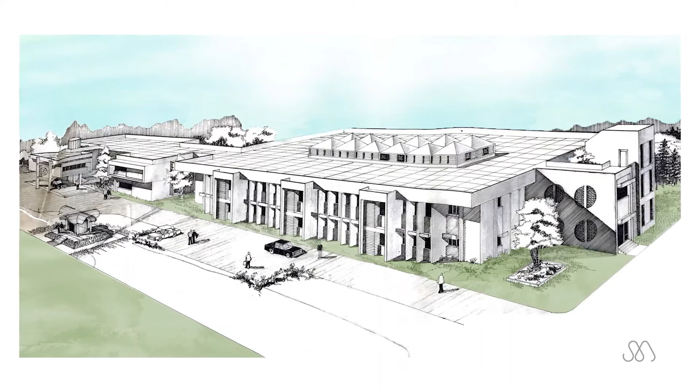But then it got tied up, and once I came out in 1980, I started practicing. The town I settled in is a Tier 2 town, not a metro city. This city didn't know much about architecture and the role of an architect on site. Even the engineers didn't know, and I had to call myself an engineer sometimes.

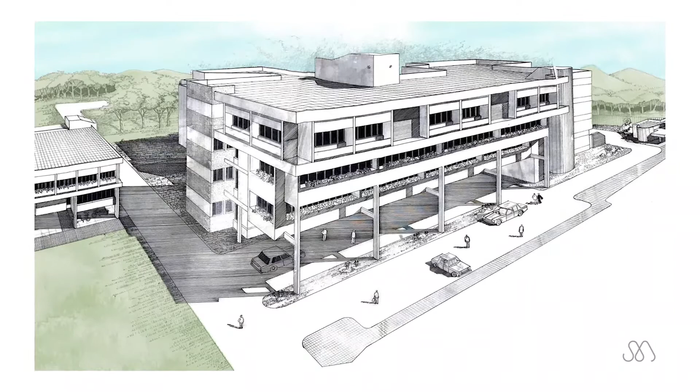There were no consultants. I had to do the structures, the quantity surveying, visit the site, and there was no project management. Even HVAC and plumbing, sometimes I had to take decisions by myself. So it was quite tough for quite some time, and somewhere in the 90s it started developing when we got systems, computers and software, and slowly people started migrating towards Trichy from other metro cities.

So with this, maybe in 2010, it became a partnership firm. My son Santosh Shanmugam studied in the US, worked for about 5 years there, came and joined with me, along with his classmate Rajakrishnan, who studied in Bauhaus, worked in UK, and joined with us. From 2010 onwards there was a regeneration, and the whole office completely changed to a contemporary structure.

All my drawing boards I have donated to some schools, and everything became systems and software. The space shrunk, but the quality increased, and the whole way of working became totally different from earlier.

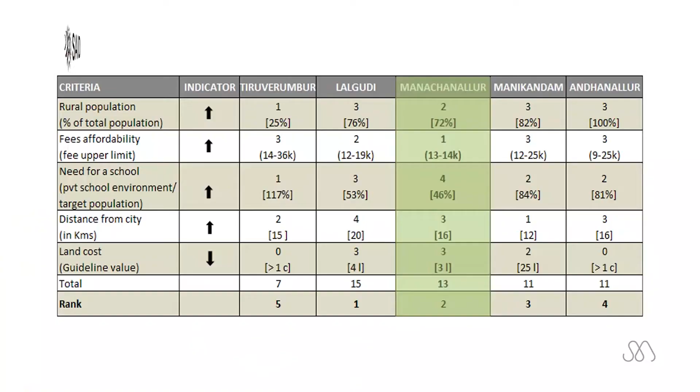In Tiruverumbur there are quite a few other institutions available, whereas in Manachanallur we find only very little option for the students to go for a CBSE school because there are only 1 or 2. And this place where we are located, for about 10 kilometers around, there is no CBSE school.

So we have located that site which is around 4.5 acres, which is not again on the main road. It is in the mid of the village, which is easily approachable by the village people. It's a clear flat land of about 4.5 acres with which we started the planning.

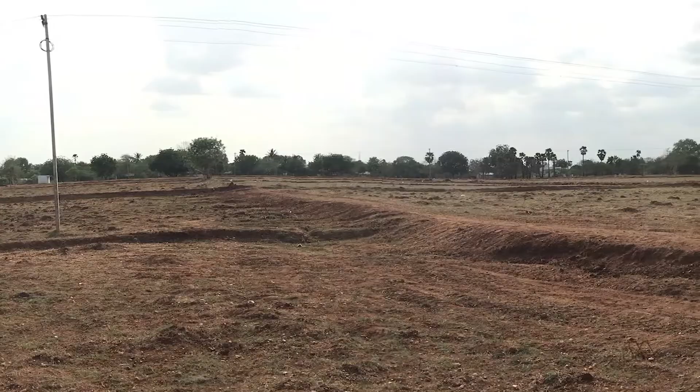We have started the planning with two major open spaces. One is the running track, which is also part of the CBSE requirement to have play spaces in the open air. So a running track for which approximately 1.5 acres of land is being given off. The rest of the building has to be planned as a linear rectangle onto the north and south, but the major site faces east and west.

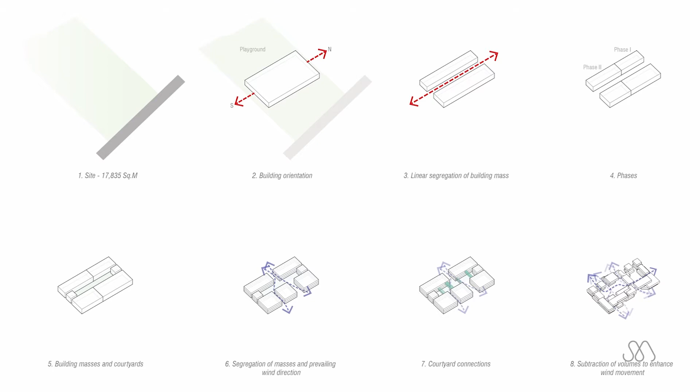But we took that to our advantage. When we studied the breeze direction in Trichy, it is more southwest, west, and northeast. So we made two blocks, segregated and segmented into blocks, and through the blocks the breeze goes in, and we also gave diagonal air tunnels from one end to the other.

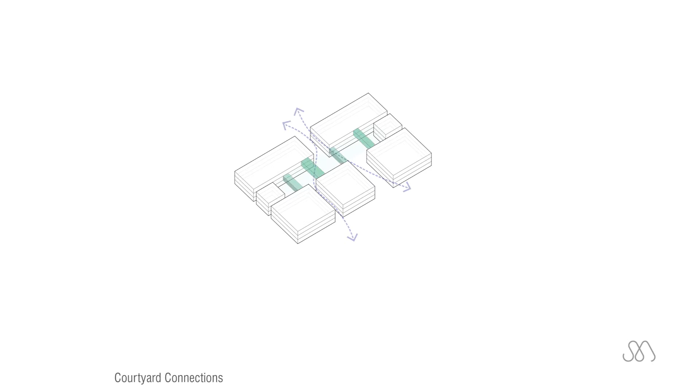And when we were doing the massing, the classrooms have gardens in between them, and the garden, one way, gives deflected light to avoid direct sunlight from the west and partially east, and it also gives a relief for the students from one area to the other.

So the whole massing started with fragments of classrooms stacked one above the other, not exactly one above the other, but with a stagger, and with wind tunnels and light catchment areas through which we get the deflected light.

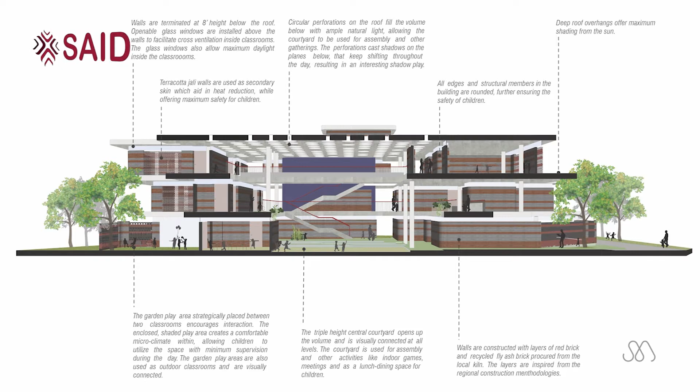So in the section you can find the walls stop at the 8 feet level, and between 8 feet and the roof it's been left open. The idea is for the hot air from the mass assembly to escape through somewhere. Otherwise, in a regular conventional building, the fan rotating from inside takes the hot air from the ceiling, and after some time the whole area becomes hot, which is not a very comfortable situation.

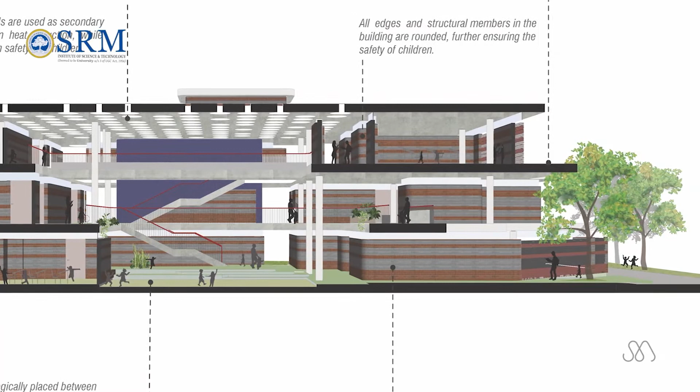So we thought we would open up on top so that the hot air would escape by itself. It's been done for the entire building so that everywhere it is open and the air flows at that level, and the hot air and radiation could be reduced. But later, due to maintenance, we found a bird menace and dirt coming through.

Of course, we did one mock classroom. We discussed with the academic people, and then finally arrived at glazing and ventilators. The ventilators will be open during class hours, and the glazing is mainly for deflected light to come through, because we have given overhangs almost everywhere beyond 4 feet, so 3 to 4 feet. So it is always under shade during class hours, and we get deflected light through that.

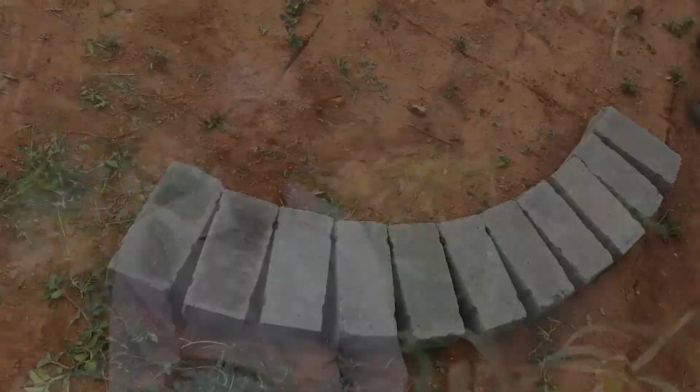We have given garden spaces on the ground floor for the kindergarten children. The garden space and the classrooms are almost the same size, so that anytime the students can go out whenever it's shaded, there is a relief. Curved walls - this is another thing which we have tried in this project.

Instead of sharp edges, the entire building is filleted with curved walls, so that the students don't get hit when they are running, and it gives a kind of character to every corner, both interior and exterior.

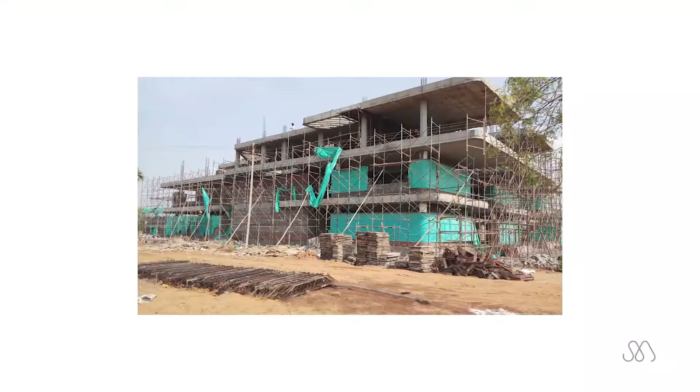Another concept we tried here: this is not a regular frame structure where the column, beam and wall come above that. The columns are very close to the walls, but we made the walls independent so our facade with brick and horizontal pattern continues without any break, and the columns are made curved and circular.

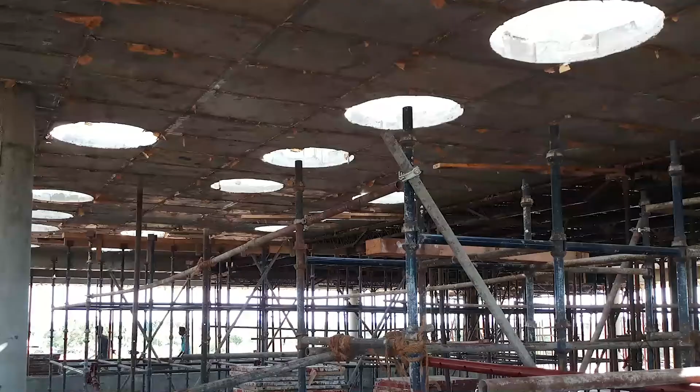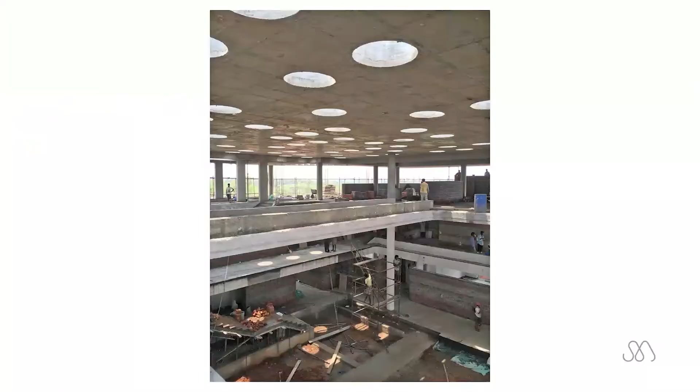So columns are made circular so that it will not be a hindrance to the students when they are breaking out. We have the central courtyard, which is fenestrated with circular openings, and these circular openings make a very nice shade pattern inside, and the courtyard becomes a kind of multi-purpose place where people play and music goes.

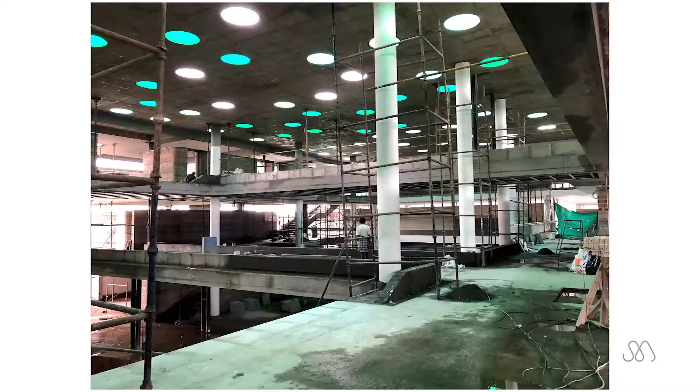During lunch hour we can see people eating, and in case of parents' meetings, sometimes it happens there, or any other activity like dancing - it becomes a very interesting place, and the sunlight moves from morning east to west, creating a nice pattern.

We bought some well rings and placed them over there in different patterns to create an interesting atmosphere.

Further, connecting bridges are placed between one section and the other, and we have not placed the bridges one above the other - it is again staggered from one to the other, so that it creates an interesting atmosphere that also satisfies the fire norms.

The staircases similarly - even though at the entry we have a regular staircase and a lift meant for the handicapped, the other staircases inside are quite broad and no staircase is placed one above the other. They go up to one level, there's a kind of landing, then walk a few steps to the other level. These staircases and bridges create a visually interesting atmosphere inside.

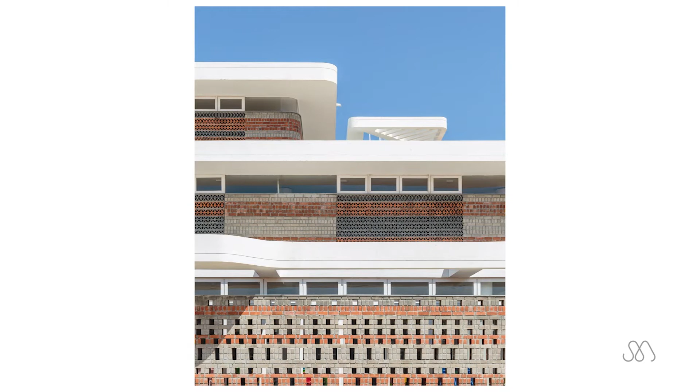We have done the walls with layers of terracotta bricks which are locally available, and also fly ash recycled bricks which are locally available. We went to the village around the temples there, and the traditional structures had layers of construction - bottom layer with stone, other layer with brick, and sometimes with lime mortar, and again done with bricks. So the temples are all done with bottom layers as stone and top layer with brick.

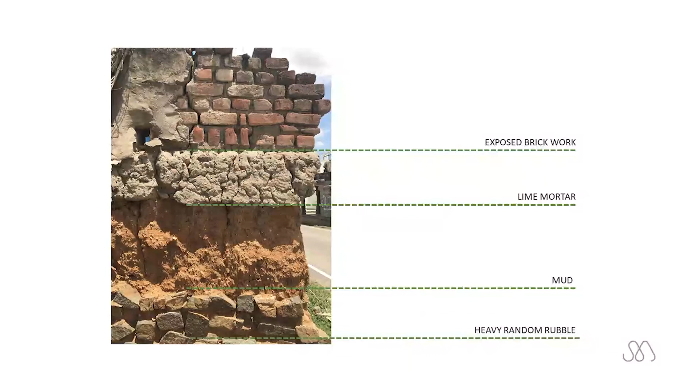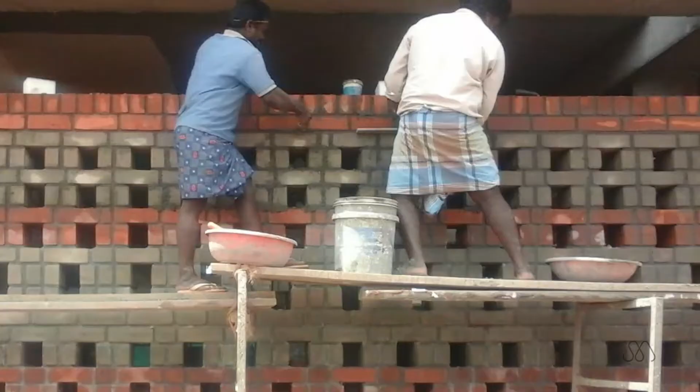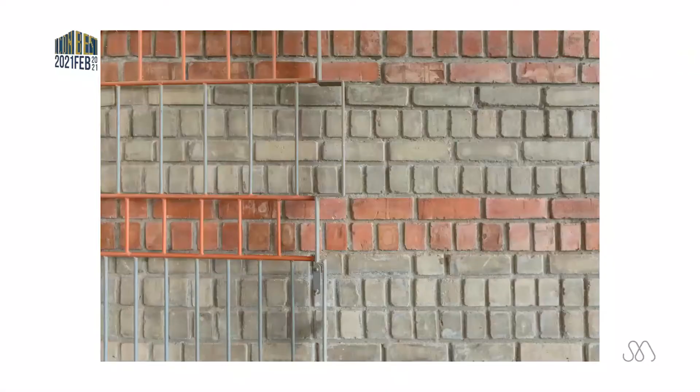This inspired us to have horizontal layers, so we used the locally available bricks and created a horizontal pattern, which in one way makes it economical, because the budget is also one of the reasons we did it this way. We have exposed it - no plastering, no putty, no painting - and even in the long-term maintenance, nothing is needed. So the budget is met, and a kind of rugged texture is formed, linked with the horizontal lines, which makes it quite interesting.

Now you can see the overall site plan where the ground is on the rear side, the OSR - open space reserved - is in the front, and the linear mass is placed in the center. For convenience, we made it into two phases. From the entry, you have the first line of security, and after the security we have the administration, and from the administration we go to the other departments.

As you see in the ground floor plan, as soon as you enter, on to the left is the administration, where the principal and vice principal sit. Their rooms are positioned such that they can see who is coming into the portico. Then there's the office and a small conference room, and of course the administrative setup.

After this, a grill gate is worked out so the student's path is completely secured. On the other side of the administration, you have the staff room. On to the left, we have the classrooms with gardens in between, and on to the right extreme, what you see is the library.

We have placed another wall in front of the main wall, like two layers, so the windows could be quite big, and in between the two walls there are greeneries. Originally we wanted to give a water body all around the library, but we made it into a garden instead, with big windows, a garden, and a kind of lawn, all part of the library, so the kids will always be interested in going to the library. So that's as far as the ground floor is concerned.

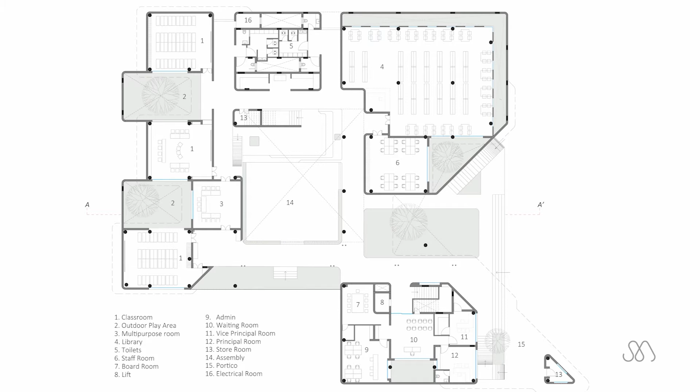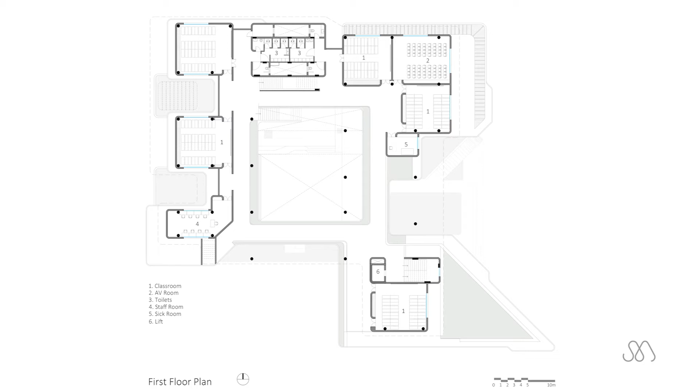Going to the first floor, at the front you have the regular dog-leg staircase which takes you to all the floors, along with a lift meant for handicapped people. On to the right, when you enter, you have a single wide staircase which takes them to the upper floor, and all the classrooms are tucked one above the other, with wind tunnels provided in such a way.

There are openings in between the classrooms which allow the wind to come in, and also deflected light. The fenestrations in the planning of the blocks allow the breeze to come in. On the second floor also, you can see mostly classrooms.

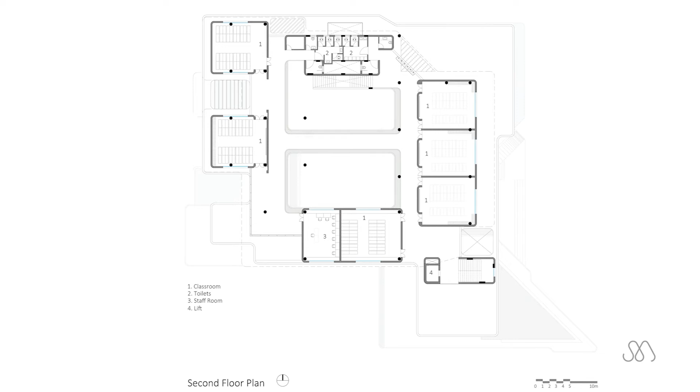One of the bridges connecting both ends is being made into a staff room, so that staff sitting there can overlook the entire happenings. When phase 2 comes, that becomes like a watchtower from which the teacher can watch both ends.

Now we will browse through some of the other learning spaces we have worked out for others. Rane Polytechnic is a ground plus one floor structure, executed in two phases. The central amenities were located keeping in mind visual prominence and immediate accessibility. The amenities, comprising computer lab, library, and seminar hall, have been planned as an island with garden and water bodies.

The surrounding classrooms have fenestrations in the north and south direction. There are stepped courtyards connecting the levels and also serving as congregation points. Considering the tropical climate, ground floor roof slabs are extended and vertical piers are placed in front for shading.

The planters have been placed within the vertical piers so that a small garden is there in front of every window. Lush green courtyards and double height shading devices have been introduced in between the built forms in Rane Polytechnic.

North Star School is a progressive international school located in Rajkot, Gujarat, and sits on the eastern corner of 17.5 acres of barren land. The semi-arid climate, dusty yet windy site conditions, 20-30 days of monsoon in Rajkot, and supply of STP water from the abutting RK University were influential contextual pointers.

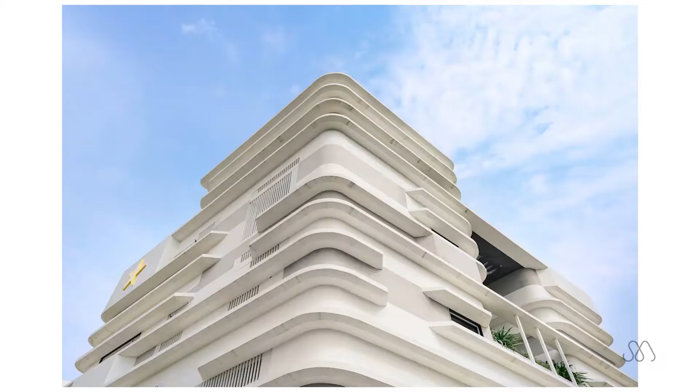North Star Nest is a kindergarten campus located in Rajkot, in easy proximity to the children. The overall massing had been played with to make this stilt plus 3-4 building look bigger.

The building is wrapped with horizontal louvers that act as a shading device and bring down the heat. Double height spaces have been introduced in staggered fashion and are interconnected on all the floors. These spaces have been provided with water and informal seating in order to have interactive fun activities.

The last roof has alphabet cutouts in the ceiling so that kids from the elder classes appreciate and understand the shadow play. Focusing on sensory perception, colorful handmade cement tiles have been introduced in the classroom floors and common areas.

We have also done some more institutions, colleges, and other types of educational institutions. You are welcome to browse through our website to know more about us.

With this, I thank SRM School of Architecture for the great effort and for the opportunity given to me at international level. It's a prestige to the hard work we have been doing for the 40 years. And for the youngsters, it's very encouraging to be more enthusiastic, to prove themselves not only at the national level but at the international level. We would like to participate in any competition also. Thank you.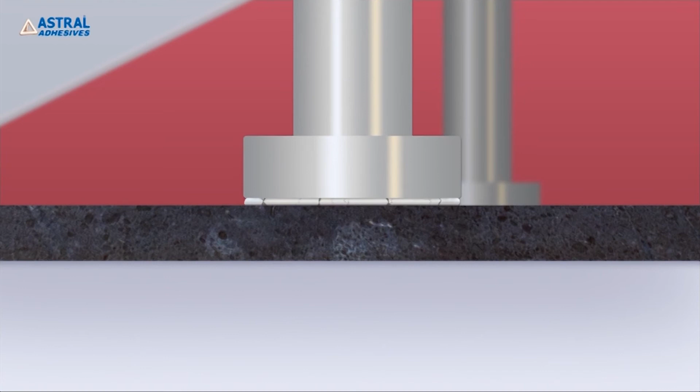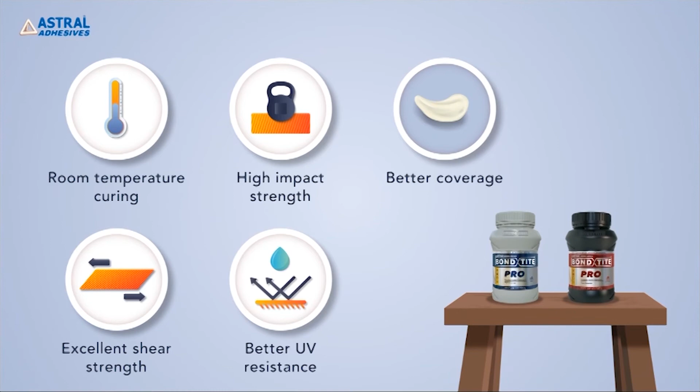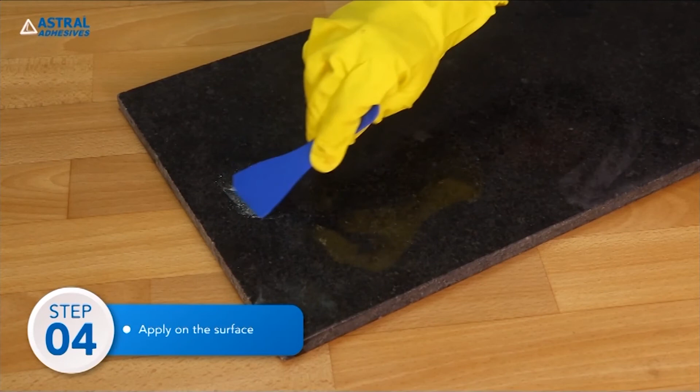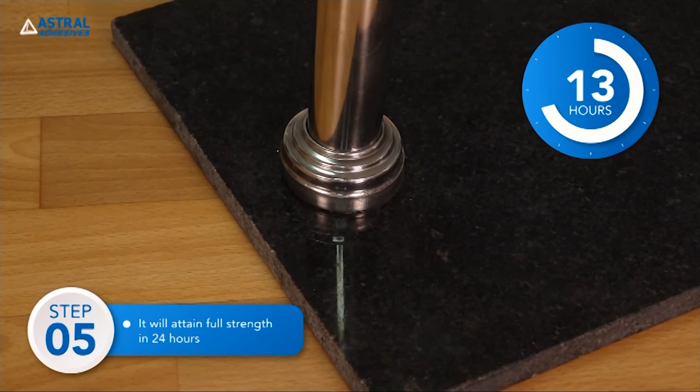Epoxy adhesives are widely used in the industry because of their high strength, chemical resistance, and ability to adhere to different surfaces. But almost all of them have low impact strength and low UV resistance, which makes them weak after long-term use under stress. To combat these issues, we are introducing Bondtite Pro, a high-performance two-component multi-use new generation epoxy adhesive system with room temperature curing. It has very high impact strength, excellent shear strength, better UV resistance, better coverage and more. It is used for bonding various similar and dissimilar materials such as metals, ceramics, wood, leather, rubber, marble, and glass. Bondtite Pro is very easy to use. Step 1: clean the surface, free of dust, loose plaster, oil, paint, grease, algae and corrosion deposits. Step 2: take equal quantity of part A and part B. Step 3: mix for 1 minute with the Bondtite applicator to attain uniform color. Step 4: apply on the surface. Step 5: clamp or support the surface for 4 hours. It will attain full strength in 24 hours. That's all there is to it.